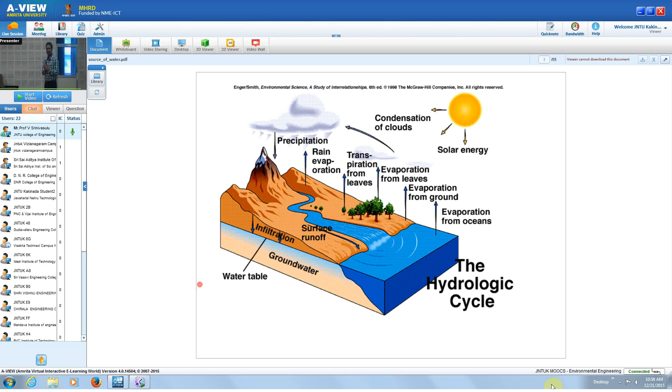Okay. So one source of water for us is rain. For all, it may be for a reservoir, it may be groundwater, it may be a lake, it may be a depression storage, whatever it may be. So today's topic, one of the topics in source of water, is the reservoir. Okay.

You know, as I said, when you construct a barrier across any natural stream, then on the upstream side water gets pooled up, right? So that pool of water is called a reservoir. Okay. So the definition is water collected in a pool, or it may be a lake, may be termed as a reservoir, right? On the upstream side of the obstruction, water gets pooled up, that is called a reservoir, right? So that is a broad general definition of the reservoir.

Okay. Why are reservoirs constructed? Yeah, the main reason is when supply is less than the demand. When the supply is less than the demand, then we think of storage of the water. If the supply is always greater than demand, no storage is required. You can directly use it from the river.

When we are getting flows throughout the year, every day, where the supply, meaning the flows in a river, is more than the demand, then there is no need of storage of water. So directly we can draw water from the river through the network of canals and use it. But India is a semi-arid country, okay, where we have monsoon only for 4 months. Nearly 80 to 85% of the rainfall occurs in these 4 months only: June, July, August, September.

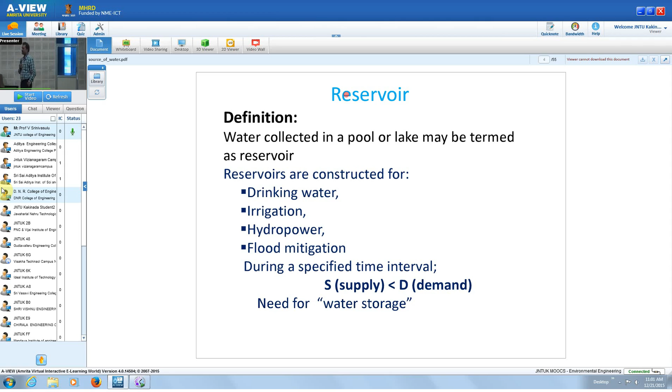So depending upon the purpose it serves, reservoirs are classified into different categories, right? So the first one is called a storage or conservation reservoir. It retains excess water supplies during periods of peak flows and releases them gradually during low flows as and when the need arises. So that is called a storage or conservation reservoir.

Where does the water come into this type of reservoir? From natural streams, natural rivers, right? The excess water is stored and that water will be utilized whenever there is a need. Such types of reservoirs are called storage or conservation reservoirs.

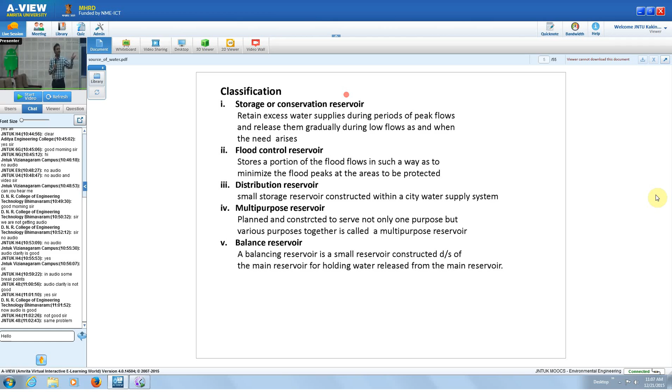Through the spillway only. Sometimes if you observe in the newspaper, in Nagarjuna Sagar, two gates were lifted. Okay, so where will that water go? It will go to the rivers, not to the canals. The excess water is released through the spillways.

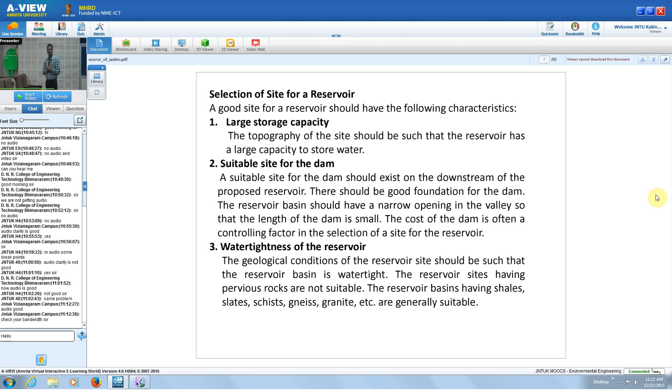Good hydrological conditions, the next point. The hydrological conditions of the river at the reservoir site should be such that adequate runoff is available for storage. The catchment area of the river should give a high yield. There should not be heavy loss in the catchment due to evaporation, transpiration, and percolation.

Generally we consider a dam or reservoir where we have very good flows available, so such streams should be selected. Also see that there are minimum losses: evaporation losses, transpiration losses, and percolation losses. And the catchment should yield more water. Such a site should be selected.

Deep reservoir. A deep reservoir is preferred to a shallow reservoir. What is the advantage of a deep reservoir? The depth is more, so the water spread area is less. Evaporation losses are directly proportional to the water spread area. Since the water spread area is minimum, we can minimize the evaporation losses. Therefore, always prefer a deep reservoir to a shallow reservoir.

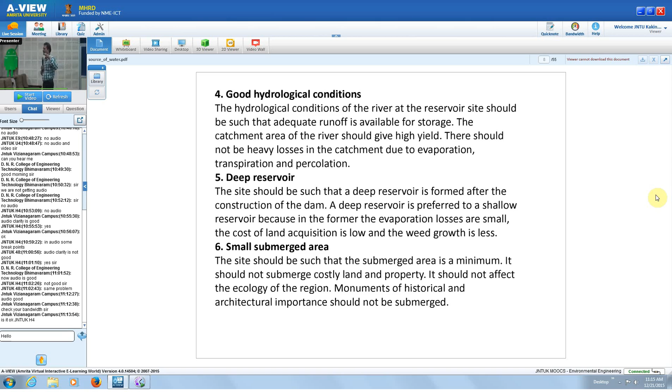And low silt inflows. As you know, when precipitation or rainfall occurs, because of the kinetic energy of the water drops impacting the soil, soil particles are detached from the earth surface, and this soil flows along with the water and comes to the stream, and these streams join the main river. So sedimentation is the biggest problem in some rivers. If you construct a dam across those streams, after some time it is not a pool of water, it is a pool of sand.

So first you study which stream has more silt in the water, and avoid such streams as much as possible. Construct the dam on the upstream side of that stream. If it is not avoidable, first treat that catchment by constructing small check dams and watershed management, and arrest the sedimentation there itself, not allowing it into the reservoir. So your dam site or reservoir site should always be away from, meaning upstream of, the catchment which has high silt in the water.

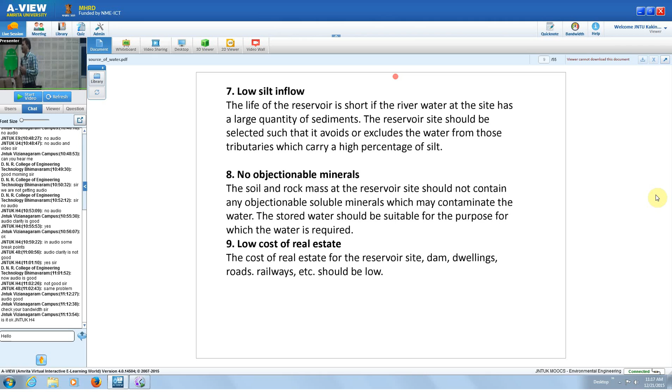Another one is no objectionable minerals. If objectionable minerals are present in that area, we should generally avoid such a site. The last one is low cost of real estate. The cost of real estate for the reservoir site, dams, dwellings, roads, and railways should be low, because 50% of the project cost goes to land only. You have to acquire land from the farmers, and if you avoid such sites, the cost of the project will be minimized. These are some of the points to keep in mind for selecting a suitable reservoir or dam site.

In general, the water in the reservoir fluctuates from the minimum pool level to the normal pool level. During the monsoon period, the level may be at the normal pool level. During the summer or dry period, the water level may be at the minimum pool level. When a heavy flood comes into the reservoir, it can be allowed up to the maximum pool level. So how do you fix the normal pool level and maximum pool level?

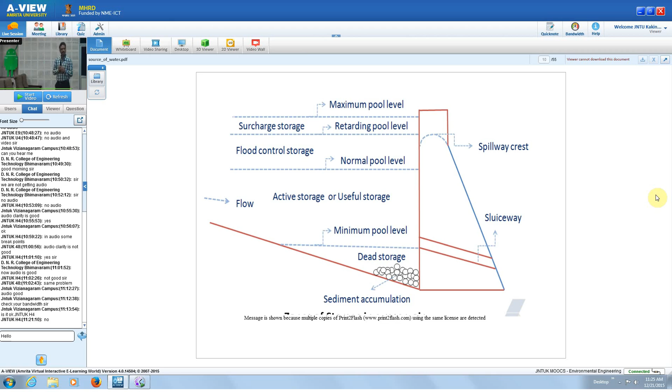Investigation for reservoir planning: as you know, there are three types of investigation for any engineering structures - engineering survey, geological investigation, and hydrological investigations. What do we do in engineering survey? We take the levels and prepare a contour map, maybe at 5 meter interval or 1 meter interval, depending upon the requirement.

Once we have the levels for the entire area, we can calculate - if your dam height is, let us say, 100 meters with respect to the mean sea level, what are the areas going to be inundated? Can be calculated. If the dam height is 80 meters, what are the areas going to be inundated, up to what contour?

Up to the 80-meter contour, all the areas will be inundated if the height of the dam is 80 meters. So this is useful for calculating the area of submerged areas, and even the volume of water stored in the reservoir.

And geological investigation, as explained in the previous section. What are the faults, folds? What are the quarry sites available for constructing the dam if it is an earthen dam? These investigations should be carried out in a geological investigation.

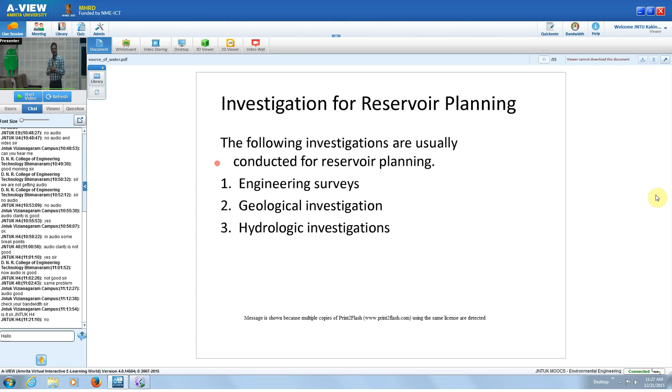Generally, a contour plan to a scale of 1:250 or 1:500 is prepared, with a contour interval of 1 to 2 meters. The contour plan should cover an area at least up to 200 meters upstream and 400 meters downstream, and for an adequate width beyond the two abutments. So that is the engineering survey for a dam site.

If it is a reservoir, the scale is 1:15,000 and the contour interval is 2 to 3 meters depending upon the size of the reservoir. From this data we prepare area-elevation and storage-elevation curves, for different elevations up to an elevation of 3 to 5 meters higher than the anticipated maximum water level.

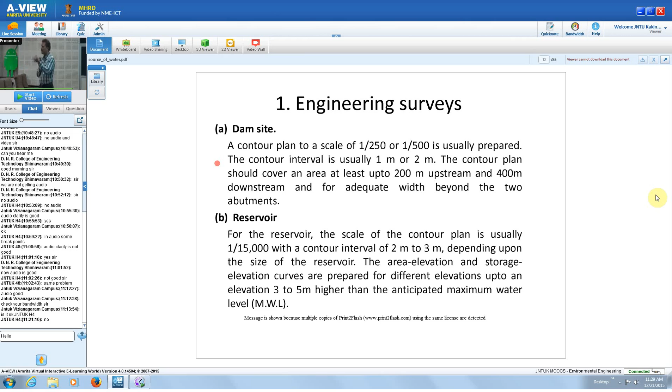Once you have a contour map available, you know for each contour what area will be submerged. If you know the vertical height and the area, can you calculate the volume between two contours? Using the Prismoidal formula or Simpson's formula, we can calculate the volumes. So we can prepare a graph between elevation versus storage. If you know the elevation in the dam, the storage can be easily calculated, since the volume between two successive contours can be calculated from the vertical height and area.

So this is a typical diagram, an elevation-area-volume curve. On the y-axis is elevation above mean sea level, and on the x-axis is volume. This curve is the elevation versus volume curve. For any elevation, let's say the minimum operating level or minimum pool level, the volume can be calculated.

This is very useful for day-to-day operation of the dam or reservoir. Suppose today the water level in the reservoir is 75 meters. At 75 meters on the y-axis elevation, draw a horizontal line, and from where it touches the curve, draw a vertical line down. Then you can read the volume, which is the amount of water available at present in the reservoir.

So if you know the amount of water available, how much should be released for irrigation and how much for domestic purposes can be planned. This is very useful. These curves will be revised once every 20 years. Why? What is the reason?

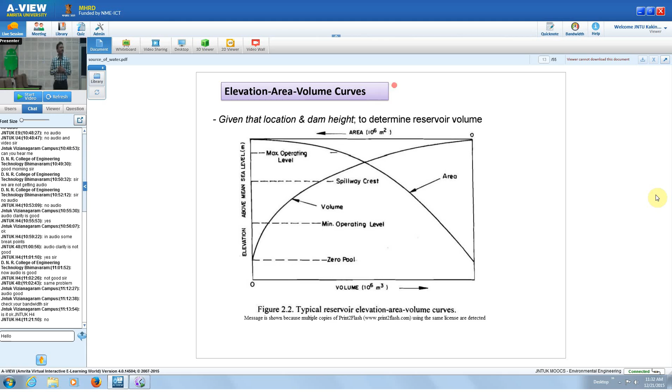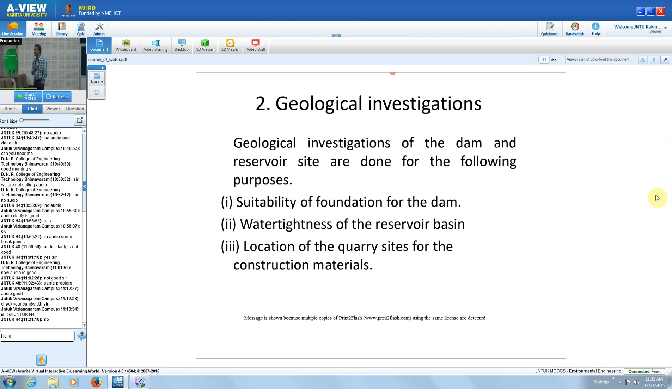So these are the geological investigations. What geological investigation we do is suitability of foundation for the dam should be studied, and the water tightness of the reservoir basin should be studied, and location of the quarry sites for the construction material is also studied under the geological investigations.

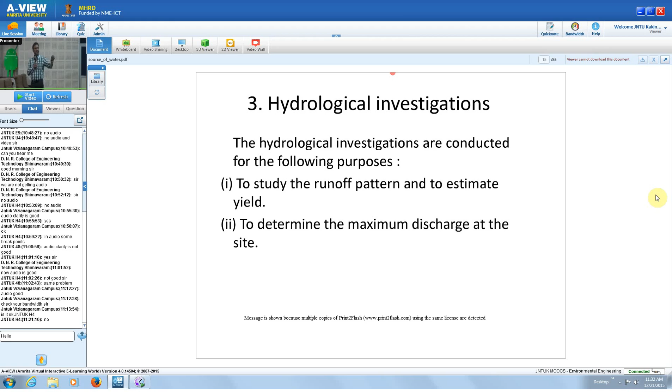The hydrological investigations study runoff patterns and estimate the yield, and determine the maximum discharge at the site, that is the design discharge, flood discharge, to fix the various levels of the dam. So this is useful - runoff pattern and yield. The most important aspect of reservoir planning is to estimate the quantity of water likely to be available in the river from year to year or season to season.

So how do you estimate the flows and yield from the reservoir based on the observed data? First you should have a gauge site at that point, where we will measure the flows in a river. If you have the data for the last 50 years, analyze it using any statistical or conceptual methods and estimate the yield from the river. If you know the yield, then you can fix the reservoir capacity.

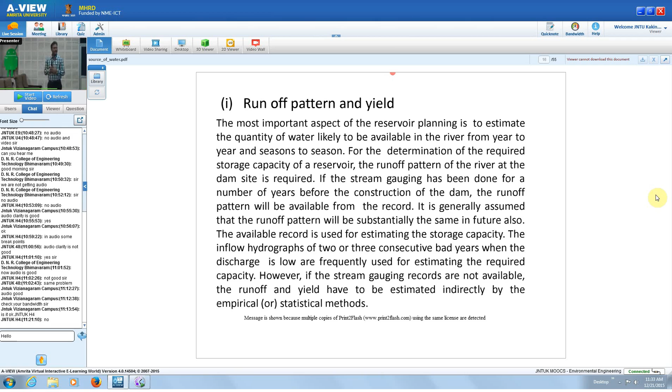The maximum discharge or flood discharge can be estimated using empirical relations, mostly correlated with the catchment area, or statistical methods, or unit hydrograph method, or you can do flood frequency analysis also. Usually for big reservoirs, a 1,000 year flood is taken for spillway design.

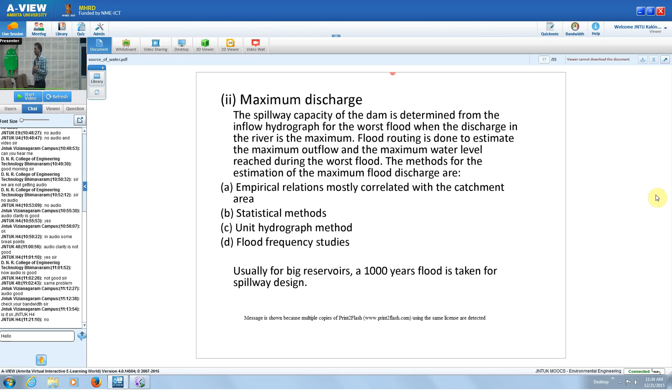So the next topic is determination of the required capacity. How do you determine the capacity? How do you fix the reservoir capacity? It depends upon what? What is the main factor?

Demand. How do you design this hall? Based on the demand. Suppose if there is a conference, it should be accommodated for maybe 150 to 200 members - based on that we will design the room. Similarly, the reservoir capacity will be estimated based on demand. A demand may be irrigation demand, or drinking water supply for a municipality, or it may be a demand for industrial purposes. All these demands should be calculated.

So for a specified time period, if this is the demand, to meet this demand, what should be the capacity of the reservoir? That is our objective. First the demand is fixed - so this is the demand we want. So to meet this demand, what should be the capacity of the reservoir? Understood? That is our objective.

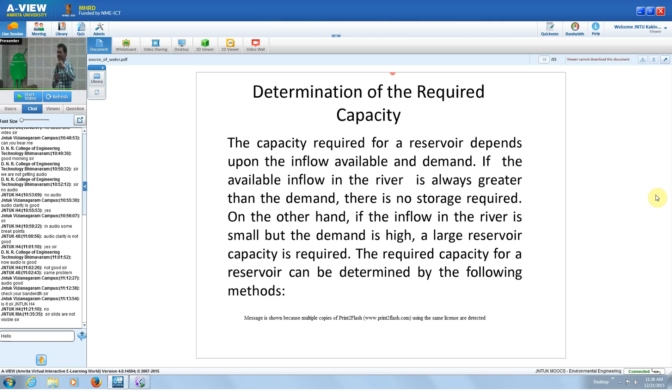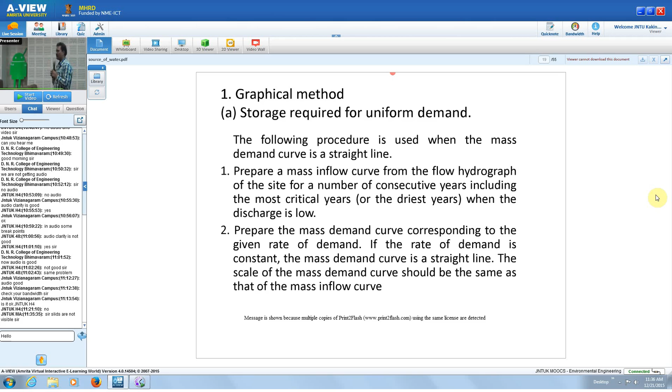This can be solved using a graphical method - the mass curve. First we have to prepare the mass curve. The mass curve is cumulative inflows against time. We have 50 years of data available in a river - cumulative every year what is the flow, and the second year, first year plus second year is the cumulative inflow. I draw a graph between cumulative inflow on y-axis and time on x-axis. You will get a graph that is called the mass curve.

First, this is the mass curve - the continuous line is called the mass curve. It has peaks and it has troughs also. So this is called the mass curve - a graph drawn between cumulative inflows on y-axis and time on x-axis. So this is what we are going to do here - fixing the reservoir capacity.

Based on the known demand, on the same graph you draw the demand curve also. So the lower one is the demand curve for 1 year - for 1 year the demand is Mn. This procedure applies when the demand is constant.

For 1 year, the demand is Mn. First prepare the mass curve - cumulative inflows on y-axis and time on x-axis. On the same mass curve, plot the demand curve also. This procedure is for when the demand is constant. Plot the demand and join the line - the demand curve. The slope of the demand curve gives what?

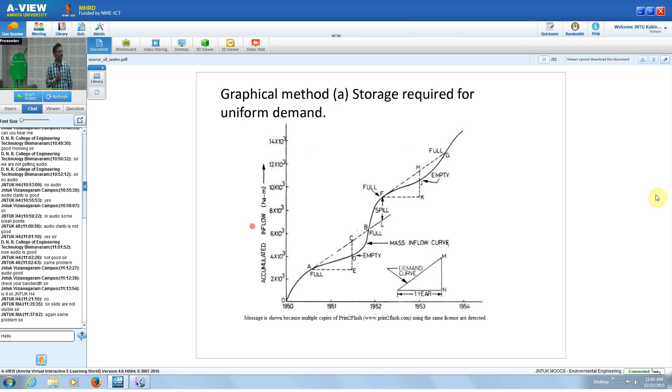This is the procedure when the demand is constant. When the demand is constant, the reservoir capacity can be calculated using a graphical method like this. Next.

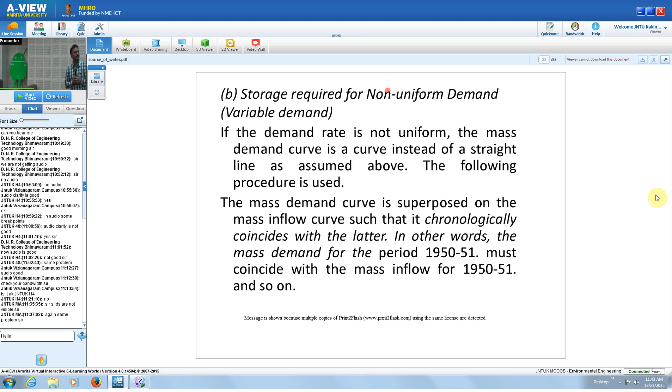When the demand is variable, when the demand is not constant, it varies. In the earlier case, the demand is constant per year. When the demand is variable, how do you fix the reservoir capacity? Draw a graph of mass inflow and demand on the same graph, because the demand is not constant, it also varies. Maybe in January it is more, February it is less, like that.

Draw both the demand curve and mass curve on the same graph paper and find out the vertical intercept between the two curves. The maximum vertical intercept gives the minimum reservoir capacity required to meet the demand. So this is the procedure when the demand is variable, not constant.

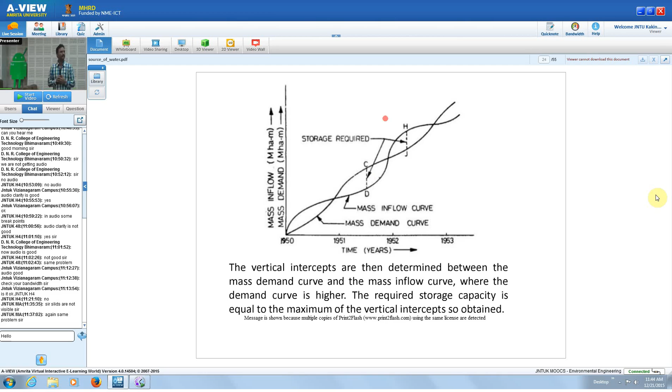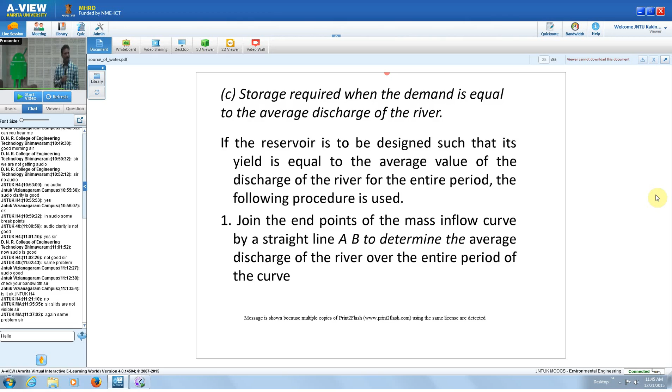So this is the procedure. First, similarly, draw a mass curve. Mass curve is mass flows on y-axis and time on x-axis. That is ADCFB, that is the mass curve. The curved one is the mass curve, right? Join the line A and B.

Draw a line joining A and B. Okay, what does it give? Average flows in a river. Now at the highest peak of the mass curve, draw another tangent at D parallel to this average flow curve. Similarly, at the lowest point C also, draw another tangent at C parallel to that curve.

Now the vertical intercept between the top curve and the bottom curve gives the storage capacity required to meet the demand, that is, the yearly average flow in a river. So this curve shows that, for that reservoir capacity, at 1950 at A, the water available in the reservoir is A dash. A dash is below, A double dash is the top one.

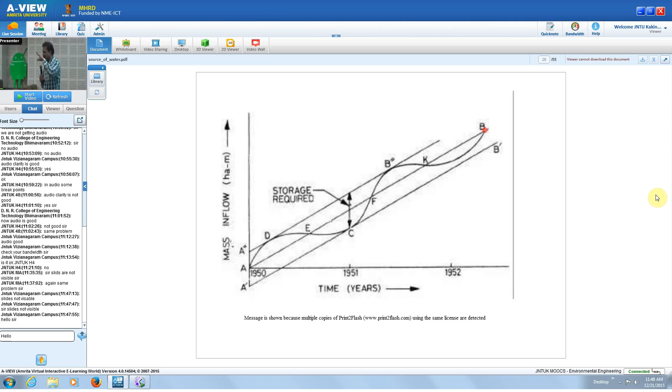So this is the procedure when the demand is given and you want to fix the reservoir capacity. Generally this happens at the beginning of the reservoir. At the beginning, we know the demand, we do a survey. These are the demands in this area, and to meet this demand we fix the reservoir capacity. After 30-40 years, generally the reservoir capacity will be lost.

Now the capacity is fixed. You cannot increase the dam height. So for this capacity, what should be the yield from the reservoir? The same reverse procedure can also be studied.

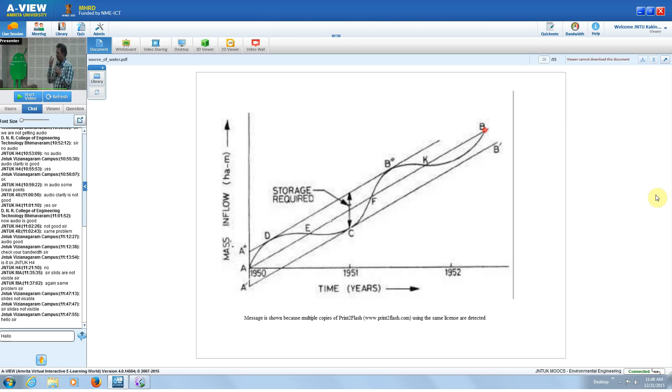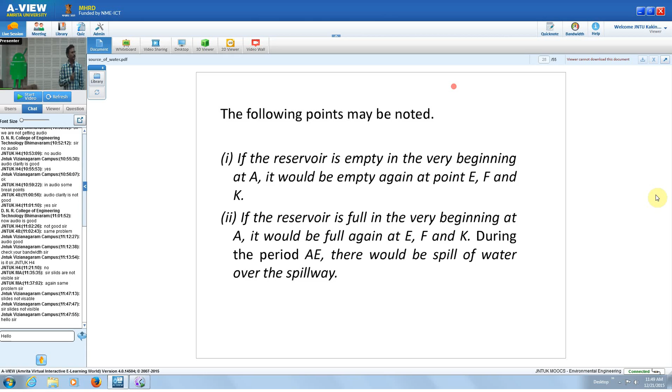Fixing the reservoir for a given demand, the graphical method we have just discussed, is mass curve analysis. Another technique is sequent peak analysis. Generally the mass curve approach is easy to use when short periods of data are analyzed. Sequent peak analysis is a modification of the mass curve method for lengthy time series, particularly suited to computer coding.

If you have 50-60 years of data and draw a mass curve, you will get a lot of peaks and a lot of troughs. So instead of doing that, this procedure is very simple. You can do some coding, programming, and it will give the results automatically. Right. Next.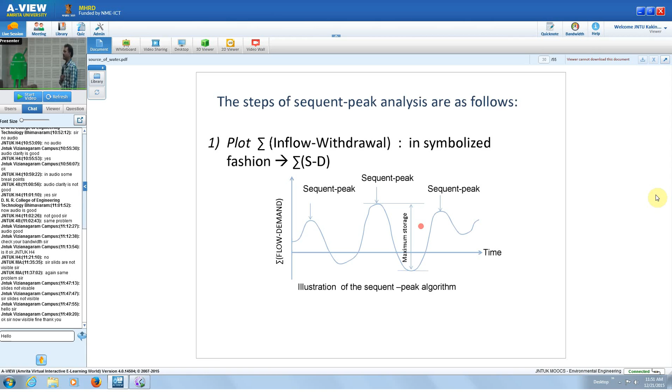The first one is the peak, and the subsequent ones are sequent peaks. The maximum storage is the difference between the highest peak and the next immediate trough. So this is another procedure to fix the capacity of the reservoir.

This is a reverse procedure: determining yield from the reservoir for a given capacity. In earlier cases, we fix the demand, and to satisfy this demand, what should be the reservoir capacity. The reverse case is capacity is fixed. So for this capacity, what should be the yield from the reservoir? Okay. The same procedure, but this is a reverse procedure.

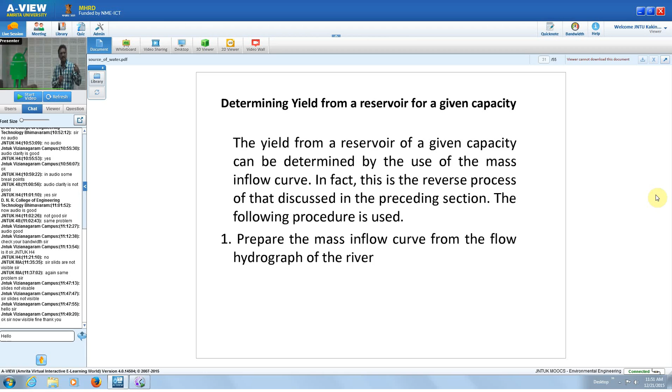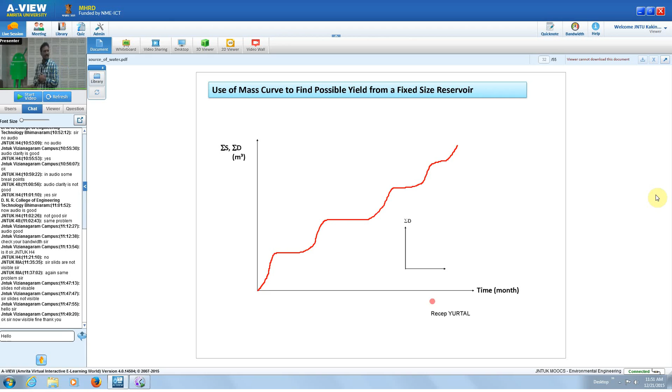Let me explain. First, draw a mass curve, cumulative inflows on y-axis, and time on x-axis. Next click. Now at the lowest point, draw a vertical ordinate. What is that vertical ordinate? It is the storage capacity of the reservoir. Okay, that is fixed. Here it is V, there also V, there is also V. Next click.

Now we draw a tangent in such a way that it touches the top of the vertical ordinate. At the peak, draw a tangent in such a way that the vertical ordinate is equal to V. Maximum ordinate is V. Similarly at another point, next click. Draw another tangent. So that slope is D2. Maximum vertical ordinate is fixed. V is fixed.

Next. Another line at D3. Everywhere, the maximum vertical ordinate is V only. But the slope is different. The first one is D1, next one is D2, and next is D3. The minimum slope of that curve is the firm yield from the reservoir. Understood? That is the firm yield from the reservoir.

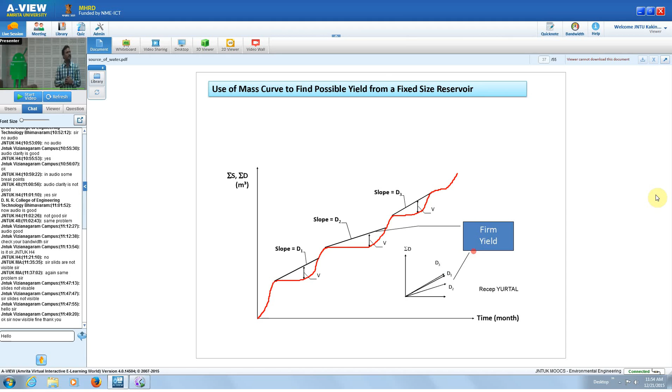In the earlier case, we draw a tangent parallel to the demand curve. Then the vertical ordinate gives the storage capacity. Here storage capacity is fixed. Therefore, we first draw the vertical ordinate, and from the top we draw a tangent. The slope gives the yield from the reservoir. So take the minimum value, that is the firm yield from the reservoir. Just the reverse procedure. D2 has the minimum slope, therefore that is the firm yield from the reservoir.

So let us see one numerical example. This table gives the mean monthly flows into the reservoir every month. Determine the minimum storage required to satisfy a demand, inclusive of all losses. The rate of demand is 50 meter cube per second. The first column is month, from January to December. The second column is monthly flows. In January it is 60 meter cube per second, in February it is 50, like that. The third column is days in a month, January is 31 days, like that.

The fourth column is calculated monthly flow volume. How do you calculate that? This is cumec-day. Multiply the second column with the third column, you will get the fourth column. That is 60 into 31, 1860 cumec-days in January. Similarly, 1450 cumec-days in February. Then the accumulated volume in the fifth column: add 1450 to 1860, then 3310 in February. Now we have cumulative flows in the river.

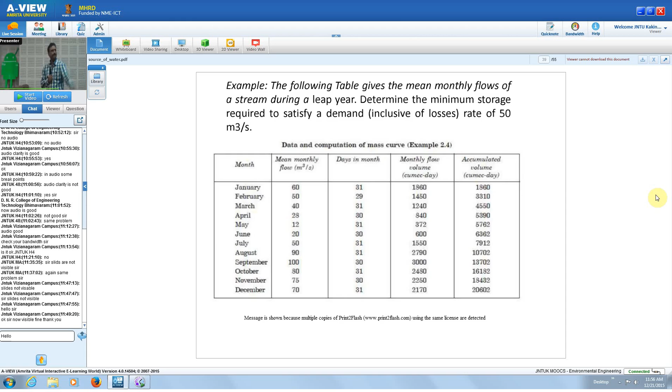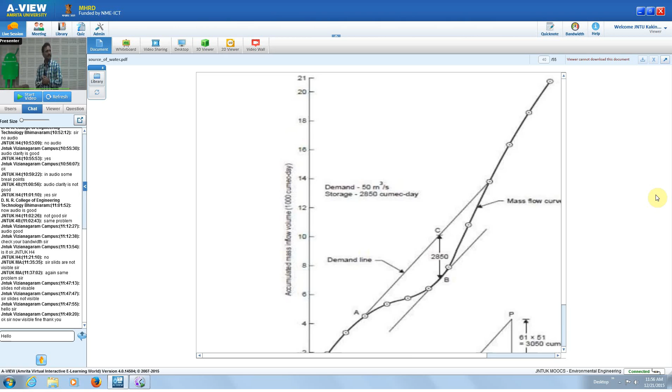Versus time, can you draw the mass curve? This is the mass curve. On the same graph, the demand curve. There is a mistake here: 51 was there, but actually it is 50. For the scale he has taken 2 months, average 30.5 days in a month, so 30.5 into 2 is 61 days. The vertical ordinate P is 61 into 50, that is 3050 cumec-days. If you join PR, it is the rate of demand.

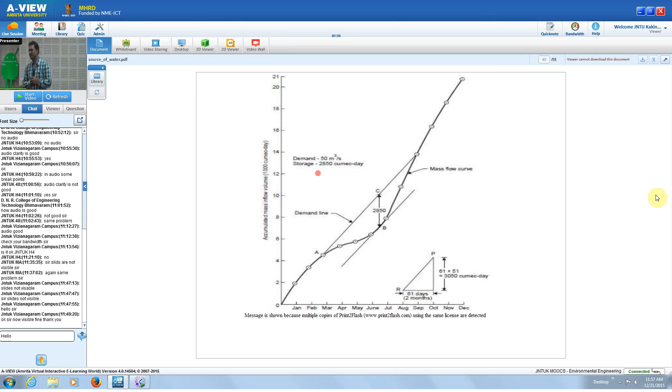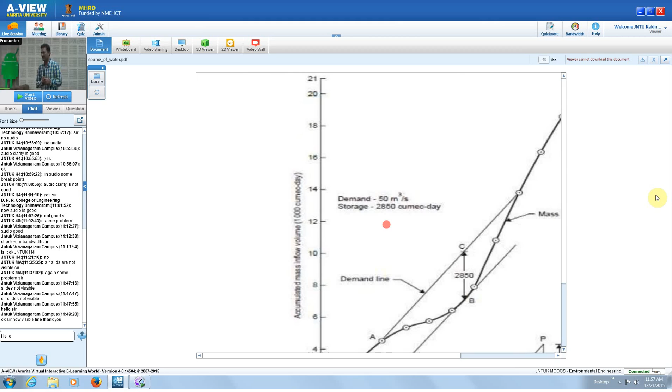Now here we have only one peak, A. At peak A, draw a tangent parallel to this demand curve RP. Now measure the maximum vertical ordinate, the maximum deviation from the mass curve. The maximum deviation is 2850. That is the required storage capacity of the reservoir to meet the demand of 50 meter cube per second. Is it okay? Next slide.

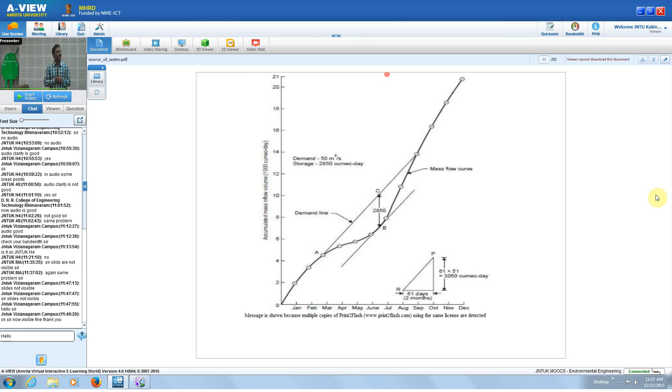Next. This can be solved analytically also, not only graphically. So this is another example.

The yield of water in million cubic meters from a catchment area during each successive month is given: 1.4 million cubic meters in January, then 2.1, 2.8, like that. Every month the flows in a river are given. Determine the minimum capacity of the reservoir required to allow the above water to be drawn off at a uniform rate, assuming no loss of water over the spillway.

The third example, as I said, the demand is the average flow of the river. In the earlier case the demand of 50 cubic meters per second was given; here it is given indirectly. The average of all flows is the demand. If you total the yield of water over 12 months, you get 57.4. That is one year's flow in the river. If you divide that value by 12, it gives 4.78 million cubic meters. That is the average rate of demand.

If you want to solve this graphically, put cumulative flows on the y-axis and time on the x-axis, and join the first point and the last point. That gives the average flow in the river. At the highest peak, draw a tangent parallel to this line. At the lowest peak, draw a tangent parallel to that line. The deviation between the two lines is the required capacity. That is the graphical method. The same can be done using the analytical method also. Next slide.

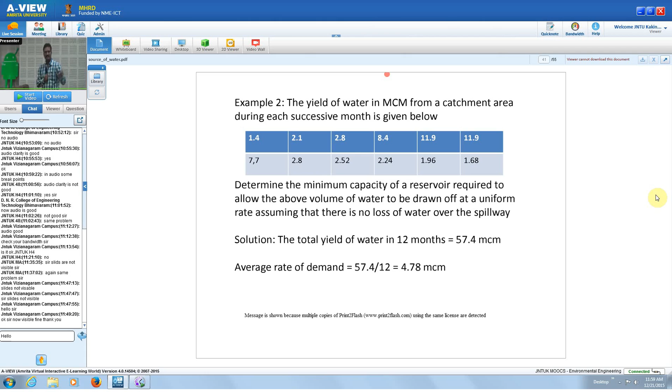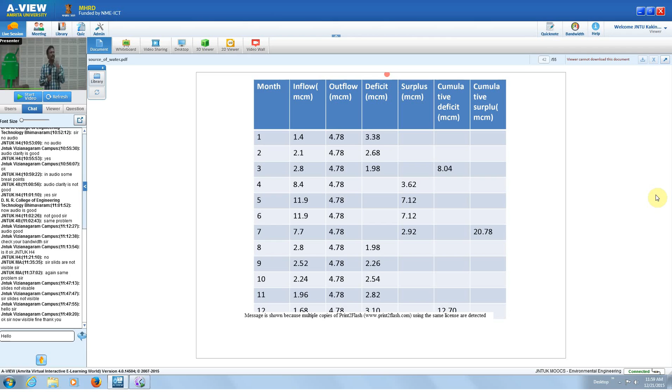The first column is month, the second is the inflows in million cubic meters, and the outflow is fixed. Every month the outflow is the same, that is 4.78. Other columns are deficit, surplus, cumulative deficit and cumulative surplus. In the first month the flow in the river is 1.4 and the demand is 4.78. So is it a deficit month or surplus? Deficit. 3.38 is the deficit.

The second and third months also have a deficit. In the fourth month the flow in the river is 8.4, but demand is only 4.78, so there is a surplus. Place those values in the fifth column: 3.62 is the surplus. Similarly, the fifth, sixth and seventh months are also surplus, and the 8th to 12th months are deficit months. Now calculate the cumulative deficit and cumulative surplus. 3.38, 2.68, 1.98 gives 8.04 cumulative deficit, and cumulative surplus is 3.62, 7.12, 7.12, 2.92. That is 20.78 cumulative surplus.

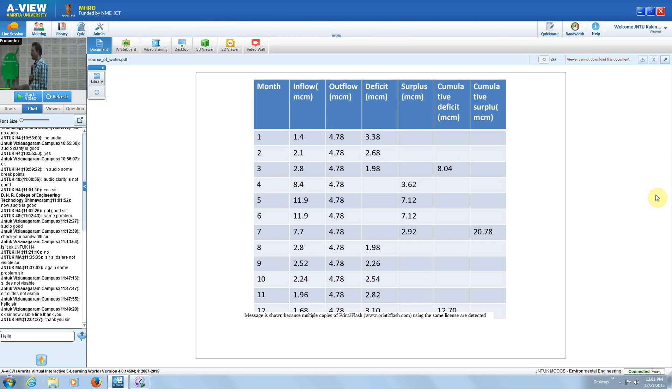Now tell me, what is the minimum reservoir capacity to meet the demand? 20.78 is the minimum reservoir capacity. The maximum value in the last two columns gives the minimum required capacity. Is it okay? That is about the reservoir.

So far we have discussed the reservoir definition, the classification of various reservoirs, zones of reservoirs, the investigations of the reservoir, engineering, geological and hydrological, and the selection of reservoirs. Next, how do you estimate or fix the reservoir capacity to meet a particular demand? There are three cases: the demand is constant, the demand is variable, and the demand is the average of inflows in the river. And the fourth is when the capacity is fixed, what should be the yield from the reservoir? That can be done using the mass curve, sequent peak analysis, and also analytically.

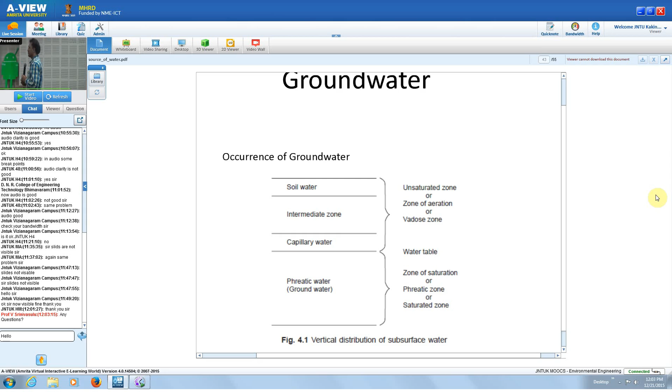If you have any doubt, please ask. Any doubts? Any questions? Maybe useful to other students sitting in affiliated colleges. No questions? At least one question? General question? Okay.

So next one is groundwater. Another source of water is groundwater. What is the main source for groundwater? It is again rain. As I said, some portion of the precipitation falling on the earth's surface will percolate down. That process is called infiltration. After meeting the soil moisture deficiency, if there is still water available, it percolates down and joins the groundwater table. Groundwater also moves from higher elevation to lower elevation, but the groundwater velocity is very low, so it takes several days, sometimes years, to reach the streams. So the main source of water is also precipitation.

Where is this groundwater stored? In the pores of a rock. You know what voids are? It is stored in voids. If the voids are completely filled with water, this is called saturated. If they are partly filled with water and partly with air, it is unsaturated soil. So the occurrence of groundwater, the water available below the earth's surface, is divided into two categories. One is the vadose zone, also called the zone of aeration or the unsaturated zone.

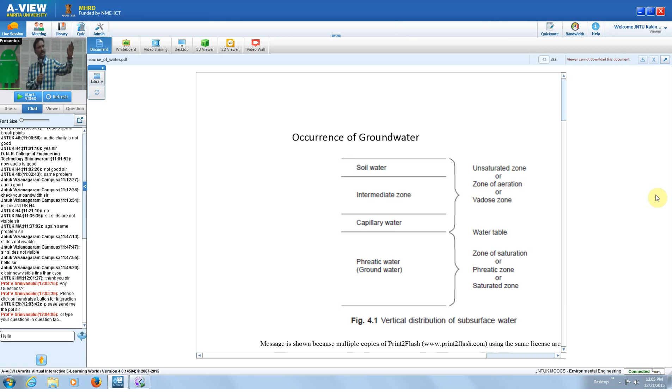What do you mean by this? Unsaturated zone or zone of aeration or vadose zone is partly filled with water and partly filled with air. Okay, so that is called vadose zone, and below that it is called a zone of saturation or phreatic zone or saturated zone. Okay, so this means all the voids are completely filled with water. Okay, so therefore the water available in this zone, that is the zone of saturation, is called groundwater.

Okay, the water available above this zone, that is the zone of aeration, is called vadose water. It's called vadose water. Not written. It is called vadose water. The water available in the zone of saturation is called groundwater. The water available in the zone of aeration is called vadose water. Again, that is divided into three categories: soil water, an intermediate zone, and capillary water.

That soil water zone is very important for agriculture purposes, where the plants take water from that zone only. Okay. Now the capillary water is even groundwater, because we have capillary action. Some of the groundwater may rise up. Okay. So up to that point, that level is called capillary water. The zone between soil water and capillary water is called intermediate zone. So this is a vertical distribution of groundwater.

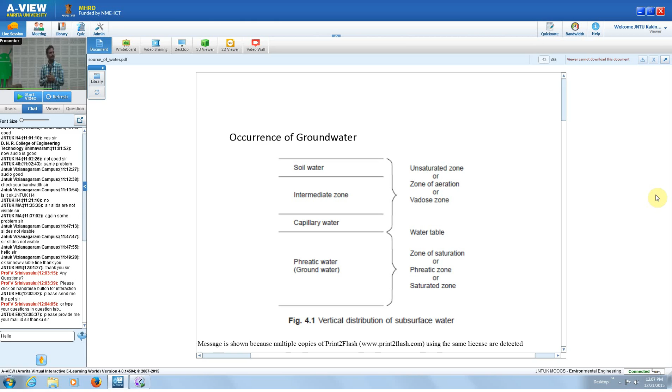Okay. You might have heard of the aquifer. Okay. Aquifer is defined as a formation that contains sufficient saturated permeable material to yield significant quantity of water to wells. So that is called aquifer. Okay. As I said, the water stores in the voids. If the voids are interconnected, it not only stores water, it also gives yield. Okay. If the voids are not interconnected, it can neither store water nor yield water. Okay. So therefore, there are different types of rock formation.

So one is an aquiclude. That is a geological formation which can only store water but cannot transmit a significant amount. Clay is the example. Okay. Aquifuge neither stores water nor gives yield because the voids are not interconnected. Okay. So that is called aquifuge. Aquitard: the yield is very low when compared to the aquifer. It stores water, but yield is very low. So these are the different rock formations: aquifer, aquiclude, aquifuge, and aquitard.

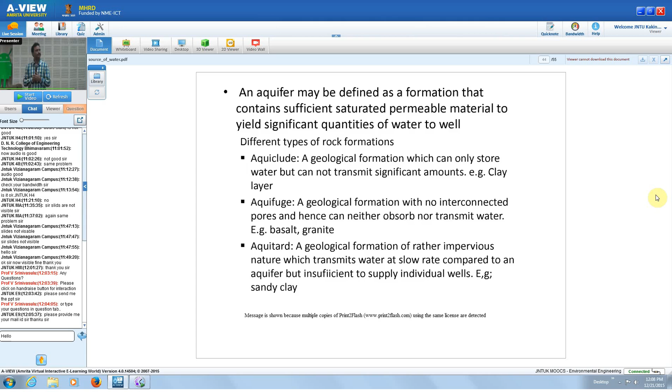Some of the properties of the aquifer: one is porosity. Okay, the porosity is the ratio of volume of voids to the total volume of the soil mass. Okay, so this property tells you the measure of how much water it can store in an aquifer, because if the voids are more, it can store more water. If the voids are less, it can store less. The porosity is more means what? Voids are more, therefore it can store more water. The porosity is less means voids are less, therefore it can store less water.

Okay. Porosity tells you the amount of water that can be stored. Okay. But it does not tell you the amount of water it can yield. There is a difference between the amount of water it can store and the amount of water it can yield. Okay. So the amount of water it can yield is the specific yield. All the water stored in the voids cannot be drained out using gravitational force or any mechanical device like pumping. Okay. We can only drain some amount of water. The rest will stay in the voids due to some chemical attraction.

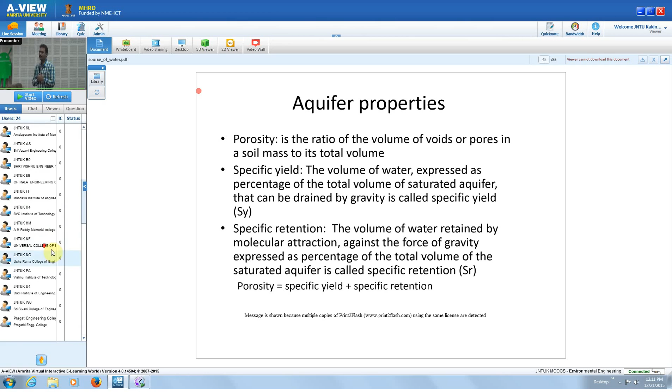Okay. So all the water stored cannot be drained out. We can only drain some portion of the water. The rest will be attached there itself in the voids because of some chemical bonding within the voids. Okay. The amount of water that can be drained, as a ratio with the total volume of the soil, is called specific yield. The amount of water retained in the voids is called specific retention. The porosity is equal to specific yield plus specific retention.

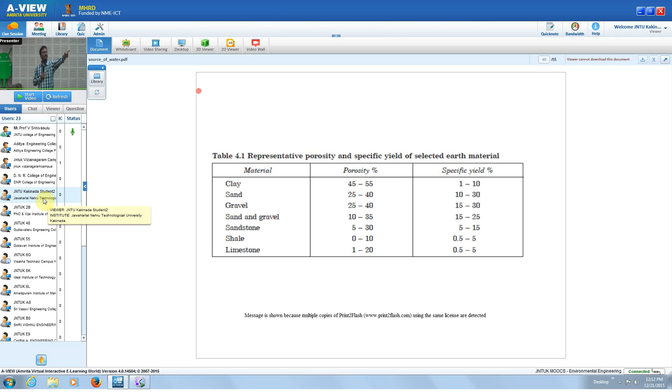Okay, so these are some values for different materials. We see for clay, the porosity is 45 to 55. For sand, it is 25 to 40. What does porosity tell you? If you see this porosity property for clay, it is 45 to 55, when compared to sand, it can store more water. But the specific yield for sand is more than clay. Specific yield is 1 to 10 for clay, but for sand it is 10 to 30. So that is the difference between porosity and specific yield.

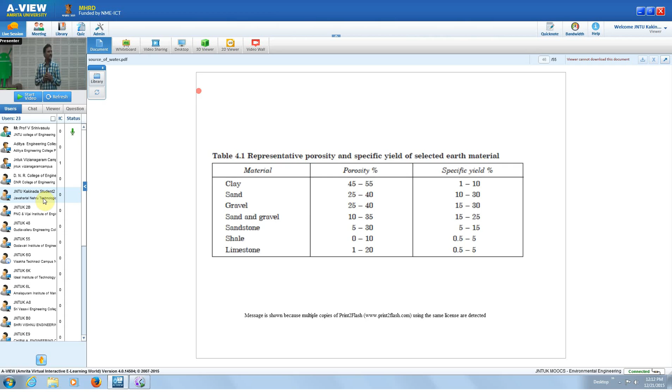Next, again there are four types of aquifers: unconfined aquifer, confined aquifer, perched aquifer, and leaky aquifer. What do you mean by aquifer? It's a huge ground areal extent. Everything below us is an aquifer.

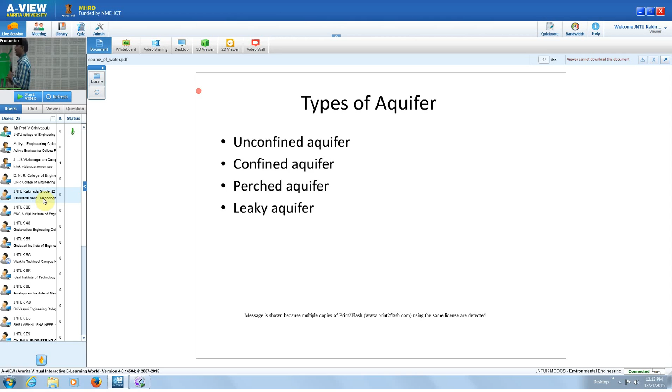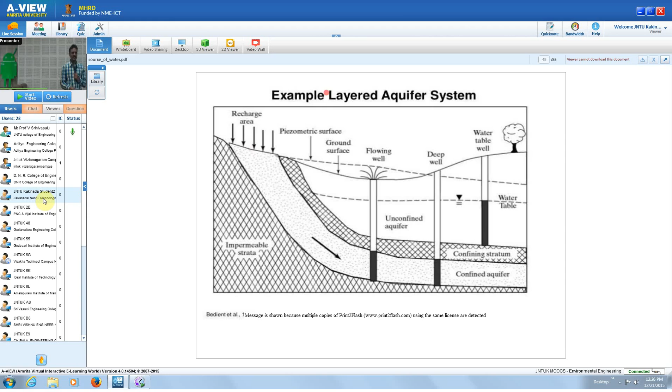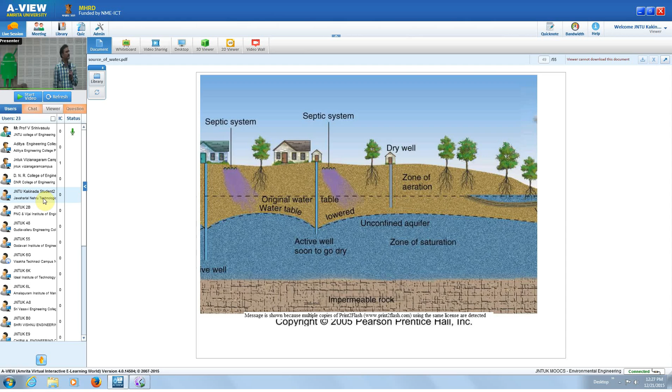Next, there are two terms: one is storage coefficient and another is storativity. These two terms can be defined as storage specific yield Sy and storativity S. Take a 1 square meter area, unit area.

For an unconfined aquifer, the storage coefficient is nothing but the specific yield. Understood? It is the amount of water it can yield for a 1 meter decline in the groundwater table, or the amount of water it takes into storage for a 1 meter rise in the groundwater table. That is called storage coefficient. If it is an unconfined aquifer, the storage coefficient is the specific yield.

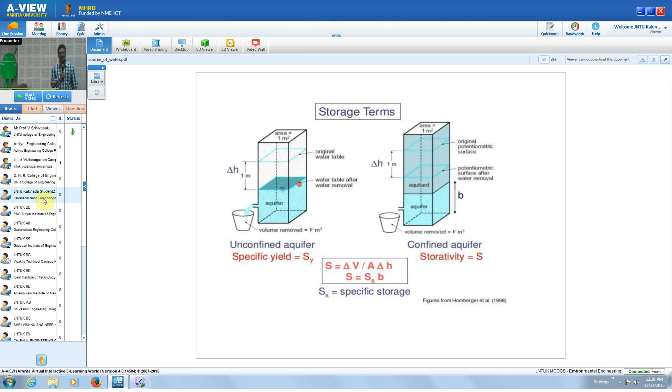For a confined aquifer, it is called storativity. Next.

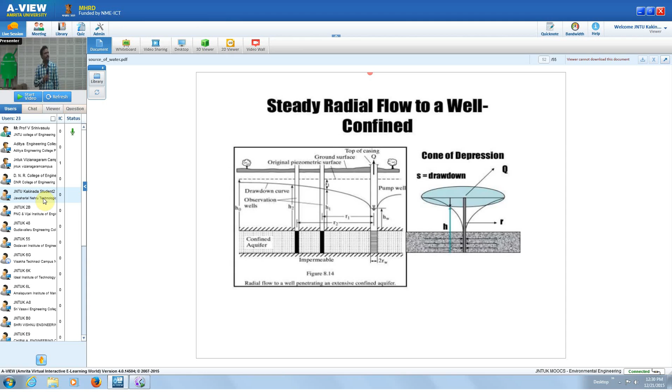Next, a small example, one or two examples, then I will conclude this unit. In groundwater, a 100-hectare area is there. The water table dropped by 4.5 meters, and the porosity of that soil is 30%. Find out the specific retention.

Specific retention is 10%. Determine the specific yield and the change in groundwater storage.

How do you calculate this? If you see the statistics of a district, they calculate the groundwater storage in different mandals, like the groundwater storage in East Godavari district and Kakinada mandal. So how do they calculate the groundwater storage?

It's just like if you take a tin, how do you calculate the amount of water available in it? If you know the cross section area and height, you get the volume, simple volume.

Similarly in ground also, if you know the area of the aquifer and there is a change in the groundwater table, let us say today it is 10 meter with respect to the top level and it falls to 15 meter, what is the change? 5 meter.

So area into 5 meter gives the volume. But it's not like water in the tin. Where does the water store in the groundwater? Only in the voids, and not only the full voids, only the specific yield. Therefore, you have to multiply that into specific yield.